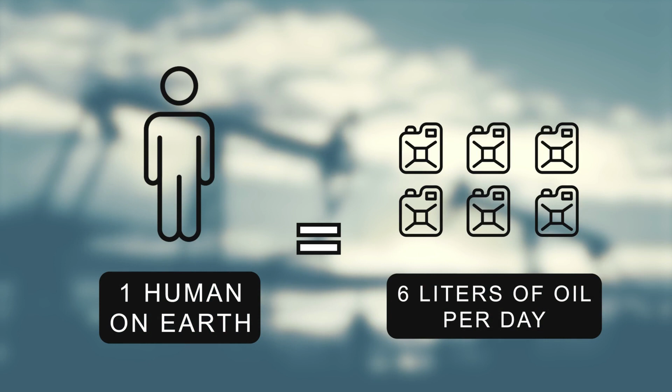Our world consumes more and more energy each year. Just in 2022, that was 180,000 terawatt-hours of energy. It is equivalent to 6 liters of oil used by every human being on our planet each day. This high energy consumption results in serious global problems regarding international security, economic instability, pollution, and climate change.

Gas turbines constitute an astonishing 14% of that energy consumption. So you have to realize that a mere 1% of thermodynamic improvement makes a huge impact. Imagine there was a technology that could make a 5% improvement. And what about 10%? Well, there is a technology that could potentially make a 15% improvement in thermodynamic efficiency.

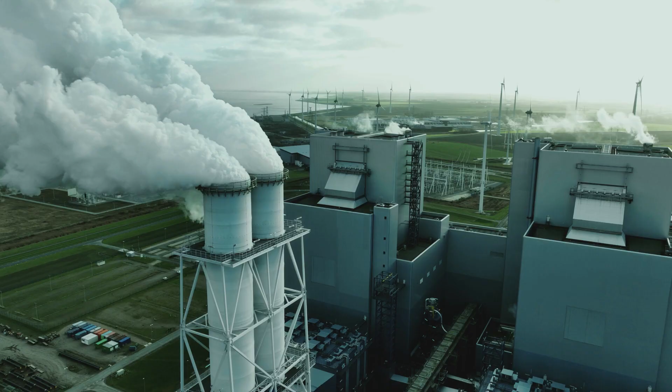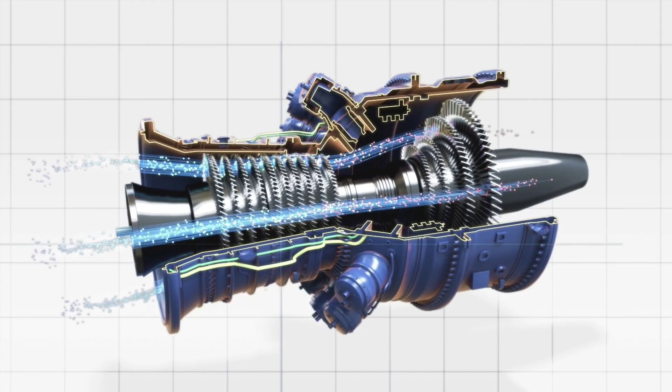Combustion has always been the most important process of releasing and transforming energy. Whether we talk about electricity generation, transportation, or space exploration, what engineers strive for is combustion at high pressure. In combustion engines, we try to compress the air first and only then ignite the fuel. With this approach, we achieve higher combustion efficiency, that is, we get more energy from the same amount of fuel.

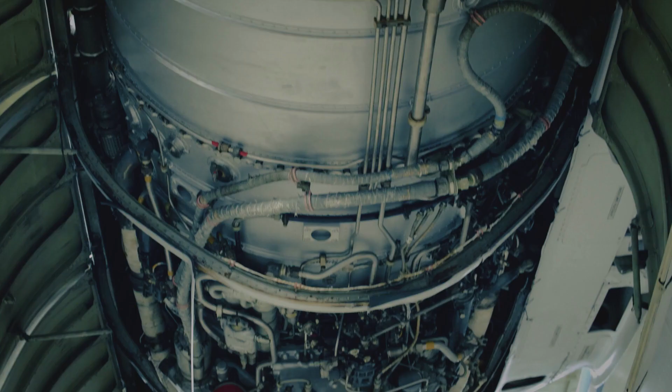However, current technologies have reached the end of their capabilities. Increasing pressure costs too much, and on top of that, it promotes toxic nitrogen oxide emissions.

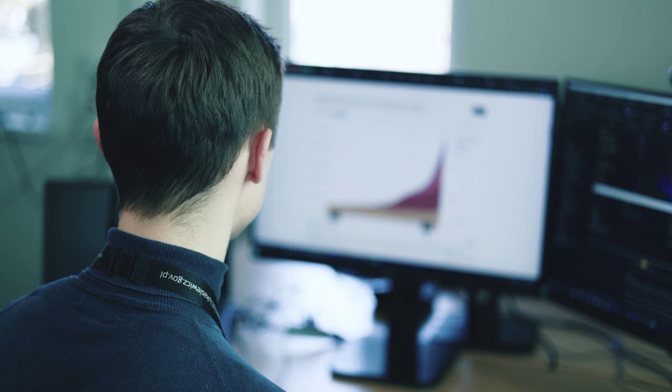This is why here, at the Łukasiewicz Institute of Aviation, we are working on the process of pressure gain combustion, used in the forthcoming game changer, rotating detonation engines, briefly called RDE.

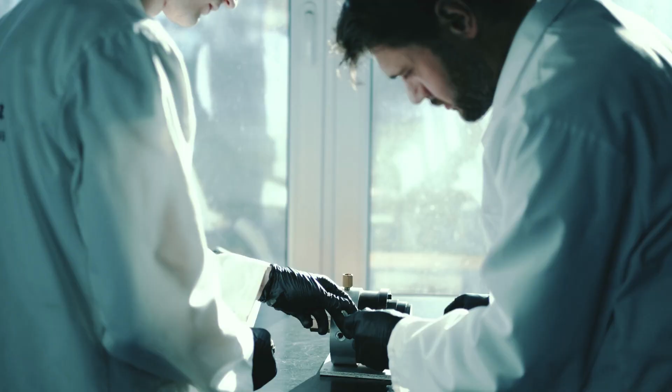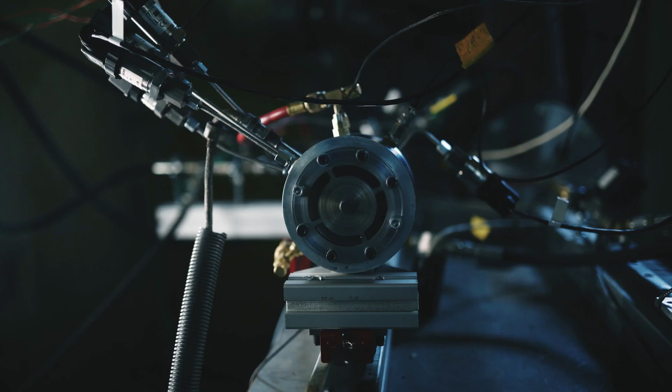When we think of detonation, we imagine a powerful and dangerous phenomenon, with shockwaves traveling at tremendous speeds, burning and destroying everything in its way. But we are working on harnessing this extraordinary phenomenon.

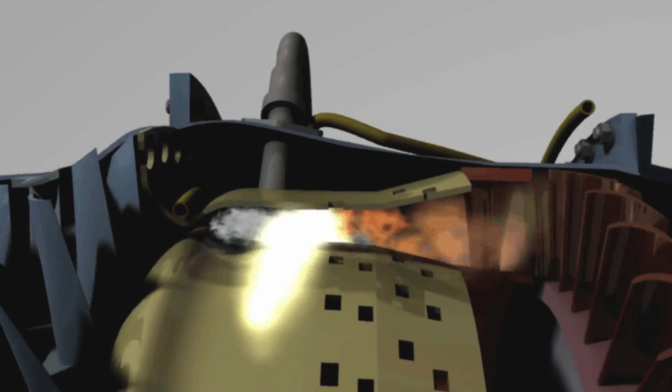If we introduce the oxidizer and fuel into the combustion chamber in a proper way, we can obtain a self-driven, rotating detonation combustion process.

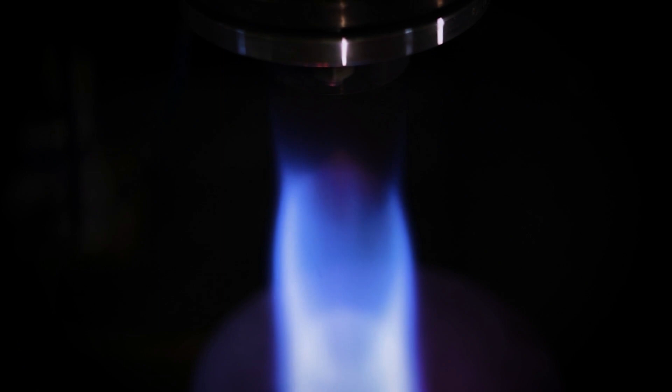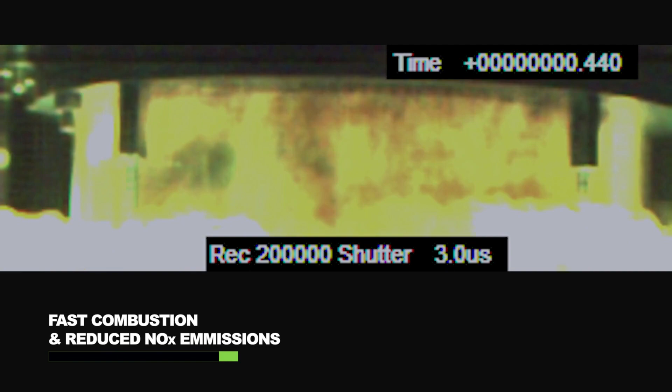What are the advantages of rotating detonation engines? One: combustion at elevated pressure. Two: detonation is 1,000 times faster than traditional combustion. Three: hydrogen, the fuel of the future, is perfectly suited for rotating detonation engines. Four: hypersonics, the future of flight, is finally possible due to RDE.

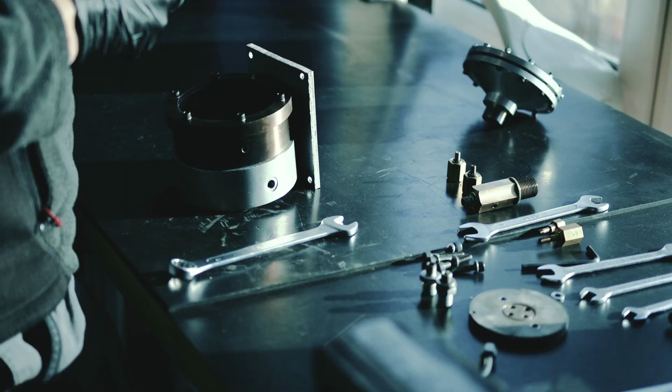We are constantly working to develop this new technology, but there are still some challenges regarding RDE: measuring, heat transfer, vibrations, and noise. RDE is an early technology. However, we have achieved a few significant steps forward in the development of such combustors.

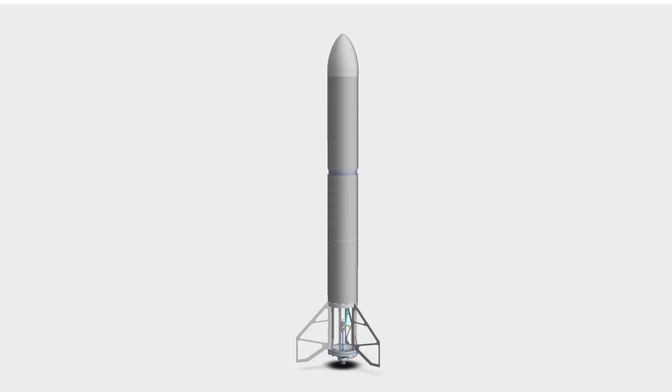When it comes to space exploration, imagine a rocket engine with a rotating detonation wave inside. Sounds like a distant future? Not really. We have launched the first RDE-powered rocket just a few years ago, and for us, this is only the beginning.

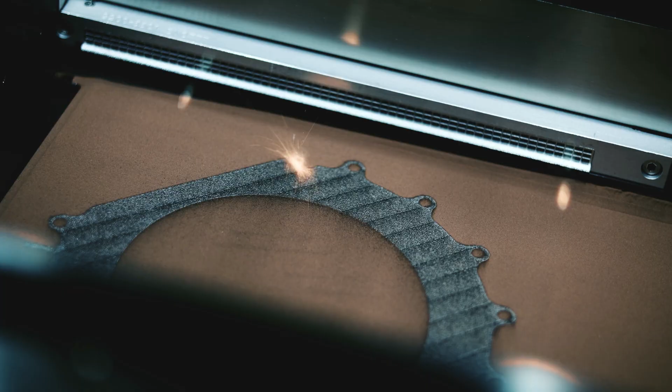And in aviation, currently kerosene is the most common fuel used there. However, liquids are pretty inconvenient for detonation. But we put in some effort and managed to initiate and sustain stable detonation in a mixture of air and liquid kerosene. And right now, we are pretty advanced in the development of an engine that could thrust an aircraft traveling at twice the speed of sound.